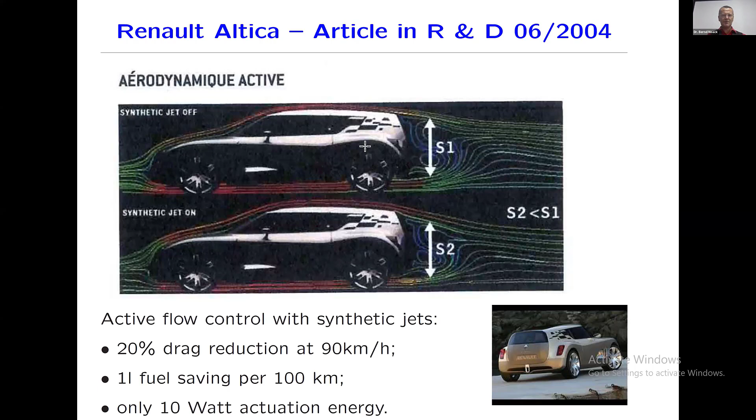Turbulence control can not only be applied to cars. You can start with more simple configurations like a boundary layer, turbulent shear layer, wake flow, jet, and grid turbulence. We are also working at this moment to reduce the drag of China's high-speed trains, which shall run at 600 kilometers per hour at some point. Skin friction reduction of ships is another opportunity. Then you have wind turbines, aero engines, production, medical applications, and so on. I'll stop here - it has applications of epic proportion.

I will now focus on one example related to the car, a simple car model, an Ahmed model. We want to reduce the drag, which is measured here on this balance. The flow comes from left to right, and we manipulate the flow with 4 independently operated slot actuators. The flow is monitored by 12 pressure sensors. Now the name of the game is to find a controller from the pressure sensors to the actuation such that the drag is minimized.

If you look at the flow, here you see a simulation, the U component in the background and the pressure on the Ahmed body. In the color code of the U component, you see many high frequency components and many low frequency components, so modeling this flow is quite a challenge - I would say it's impossible. We managed to do this for the unactuated flow with 100 modes, but to do this for the actuated flow is next to impossible. Now the question is, what shall we do? One approach is model-based control.

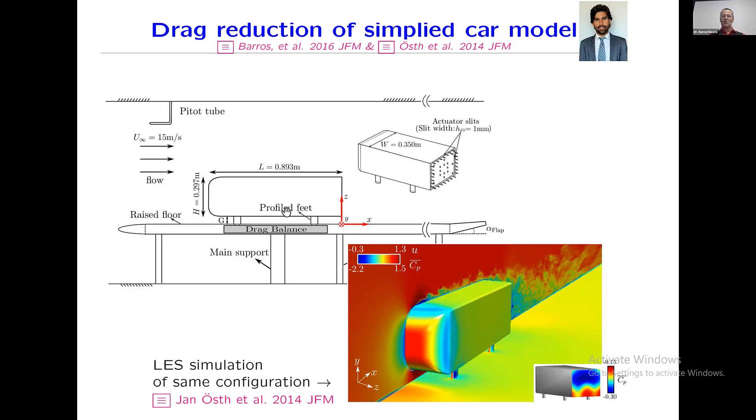In model-based control, you need a model. You have a plant and a controller. You only know some sensor information. You feed it in, the controller translates it into an actuation command. This controller shall minimize the cost—here the cost is the drag. Now you try to find a model which has essentially a very similar behavior, the same sensor readings, similar performance. Then you can build a dynamic model.

A is a flow state, B is the actuation command, S is the sensor signal as a function of flow state and actuation command. With this model, you want to derive a controller which is only a function of the measured data. Once you have the model, you can derive the controller and put it in the original plant. If everything works well, you can reduce the drag as much as in your model.

This works beautifully if you only have periodic dynamics or few frequency dynamics. It works in very simple cases, but in case of broadband turbulence, it's practically impossible.

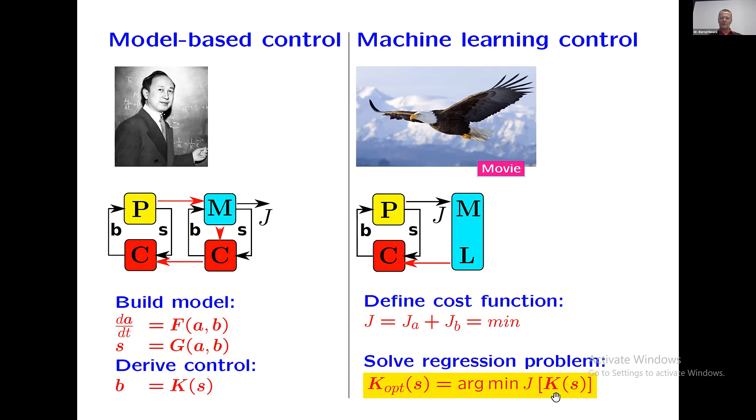But fortunately, there are very powerful regression solvers, and arguably one of the best regression solvers is genetic programming.

What we do here: we have our dynamical system, could be the experiment, and we have the controller. We have a fast inner loop—typically about 1 millisecond from the sensor signal to the decision of the control. And we have a slow outer loop—typically after 5 or 10 seconds we know if the controller works or does not work. Then we test one controller after the other using genetic programming.

Now we apply this technique to the Ahmed body, which I've shown earlier. Reynolds number is 300,000. From an engineering point of view, we can reduce the drag by 22%, and our energy investment is about 3%. So we are distinctly positive.

If we look at how much time we invested, our testing time was less than 1 hour in a wind tunnel. At the end, we found that the best is unison blowing—so all 4 actuators follow the same controller, and the controller only listens to this one sensor signal here.

And I can explain why. Essentially, only this sensor signal can measure the high frequency feedback between actuation and sensing. Everything else would have too high a noise level.

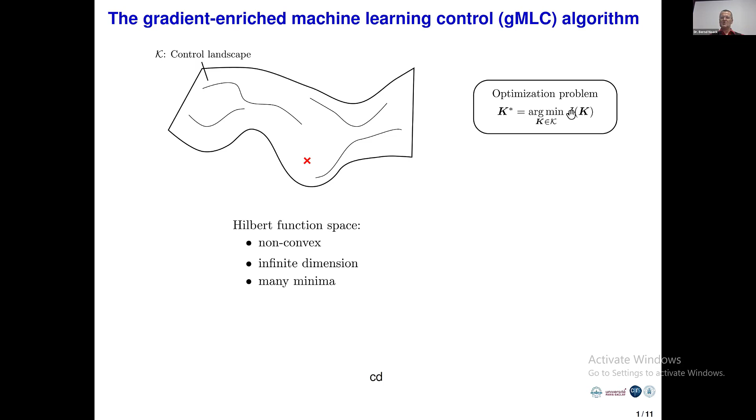Note that our search space is a Hilbert space. It's non-convex, has infinite dimension, has many minima - very nasty. And we want to solve this optimization problem: find the optimal controller which minimizes the cost.

The first step is what we do: a Monte Carlo random function set. Typically we take something like 100 individuals - so individuals are also our controllers - and then we spread them over the control landscape. In the next step, we do our genetic operations. Genetic operations are good for exploration, to find other minima, and they are less good at exploitation, descending down to accelerate, essentially descending down these control landscapes.

We include a downhill subplex. So we take the best individuals with the best cost, we make a linear combination of these controllers, and then we do a simple downhill subplex method in order to descend down. So this is the basic idea.

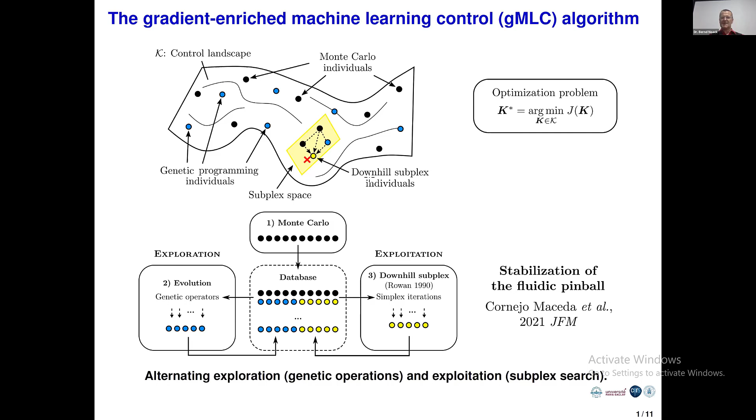And we tested another configuration, which we call the fluidic pinball. This is a few years later, and we did not have the experiment anymore. The fluidic pinball consists of 3 cylinders, all of which can arbitrarily rotate. Our flow sensors are now some U and V component in the wake, shown here. We want to make a controller using these sensor signals and driving the actuation commands, namely the cylinder rotations - 9 sensors, 3 actuators, laminar flow, 2-dimensional.

Why are we excited about this configuration? Well, in principle we can include all or the best, the most dominant drag reduction mechanisms. In the case of the Ahmed body, we have seen boat tailing, and we can emulate boat tailing by rotating the cylinders inward - this way makes the wake small. Another way of drag reduction may be base bleeding, so some fluid goes out of the inner cylinders. We can do that with the cylinders rotating in the other direction.

We can also play a bit with the Magnus effect - this may be beneficial or not. Low frequency forcing has also been observed to be potentially drag reducing, as has high frequency forcing. In this case, we rotate the top and bottom cylinder in a symmetric way. And of course, we can also do some phasor control, using a sensor signal to always stabilize the flow. So now we leave it to our machine learning control to identify the best mechanism - these are candidates which we already know from literature.

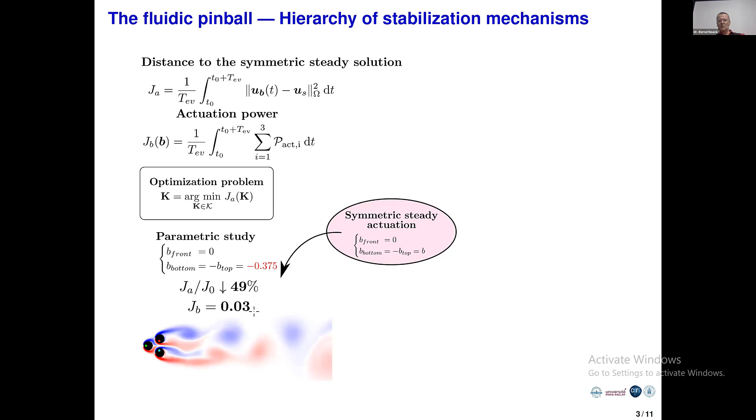The first idea which comes to mind, if you don't know anything about machine learning control, is that we should expect a steady symmetric actuation to work - bottom and top cylinders rotating in opposite direction, driven by one parameter. This is one-dimensional optimization. If we optimize that, we get about 50% closer to the steady solution, and the actuation power is 0.03, about 1% of the towing power, so it can be considered rather small.

Next, we say okay, let's take all cylinders rotating steadily - maybe we gain something more from that. We would not expect it from a nominally two-dimensional configuration, but we get it nevertheless. In this case we use an explorative gradient method to find the optimal parameters. Now we can go further to the steady solution - we are only about 28% away, and the actuation power is about 4% of the towing power. So we are better by enriching our state space, which is what we would typically expect.

As a next step, we take the feedback controller and use our optimizer which was mentioned. Now we get 80% closer to the steady solution with a fraction of the towing power. So this is the best solution.

Now the question, of course, is what did machine learning control find - what the other steady actuations were missing? If this video would work you would see that the control does a combination between phasor control and boat tailing. And I must say, in addition to the sensor signals, we also added the history of the sensor signals.

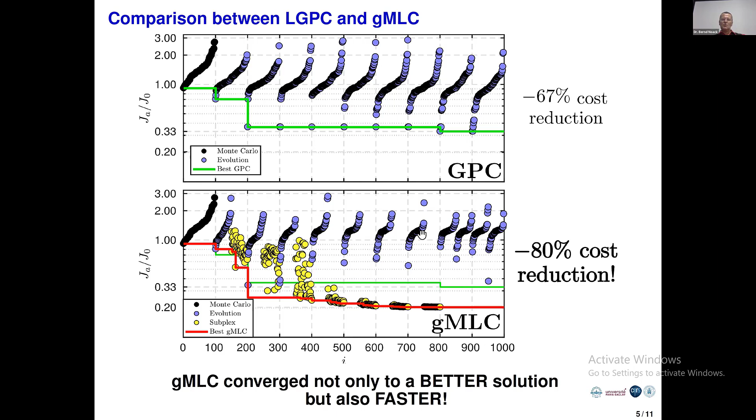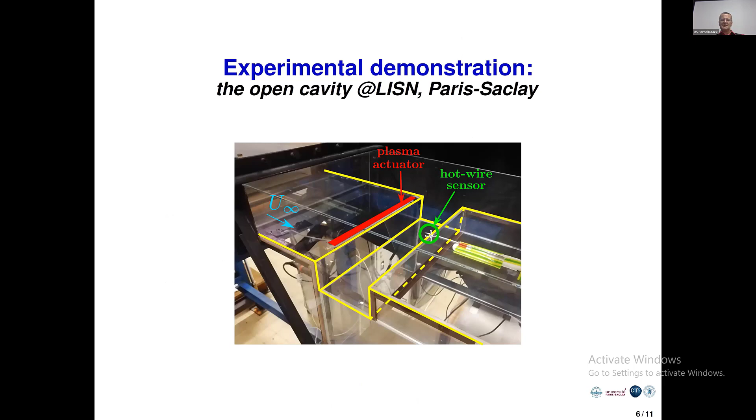Now the question, of course, is would it work in an experiment? We have tried it with an open cavity plasma actuator - here's a hot wire sensor. The goal is to stabilize the open cavity, and the stabilization is monitored essentially by the variance of the hot wire sensor here. A simple experiment.

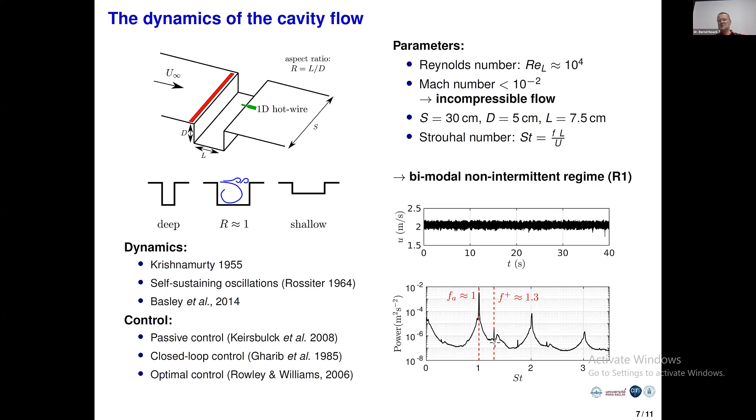Here you see the configuration again. It's not shallow, it's between a deep and a shallow cavity - about 1.5 times longer than deep. Reynolds number is about 10,000, it's an incompressible flow, and this is called the bimodal non-intermittent regime. Essentially, sometimes you have shedding with one frequency and sometimes with another frequency. In this case you see the velocity signal, but if you look at the spectrum, sometimes you see a Strouhal number of 1 and sometimes a Strouhal number of 1.3. These can be explained with Rossiter-like modes.

Plasma actuation essentially accelerates the flow near the leading edge, and if we just accelerate the flow without any dynamics, we see the spectrum here. Without actuation we get a beautiful peak at 1 and a small peak at 1.3, and the harder we actuate, the more we attenuate the flow. So the steady actuation now becomes our benchmark.

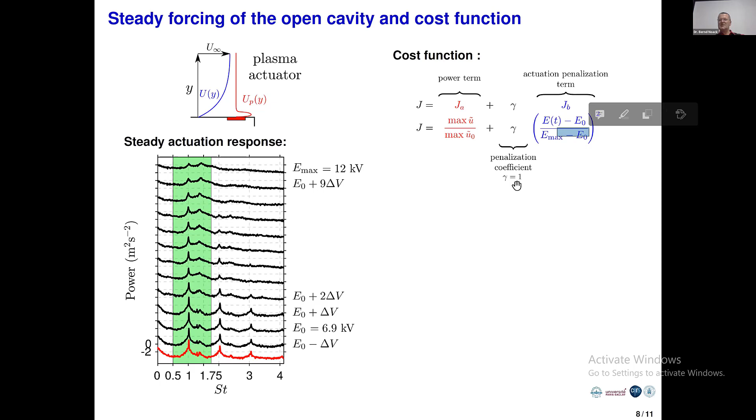What is our cost function? Our cost function is the variance of our hot wire signal divided by the variance of the unforced flow, and we penalize our voltage - so if we go to the breakdown voltage, that term becomes unity. This penalization coefficient has also been chosen at unity, so this is a cost function which we penalize. We limit our observation to Strouhal number 0.5 and 1.75, so that we clearly have the dominant frequency in our monitor, and we optimize the controller.

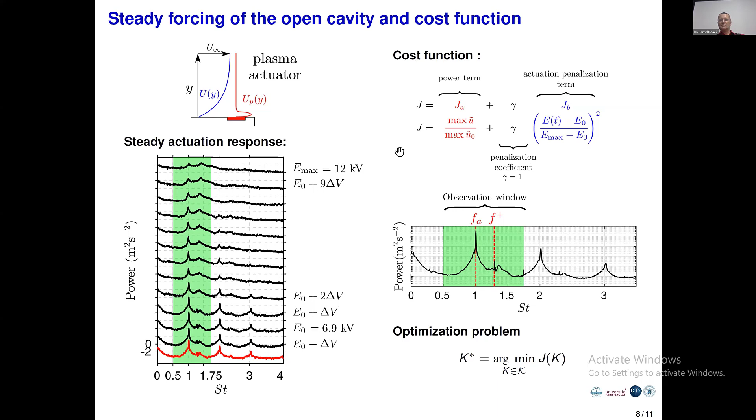Again, we test the controller, we optimize the controller with 1,000 short experiments. What we get here is a cost function of 1%, so we have reduced the fluctuation energy by a factor of 100. The actuation power is about 1% of the breakdown voltage. And there's another quantity, the variance of the hot wire signal, which also goes down.

If we use the same budget of 1,000 individuals with standard genetic programming, then we are 4 times worse, and we also have a larger fluctuation energy. So clearly, gradient-enriched machine learning control outperforms genetic programming control in the experiment.

And the feedback is really necessary, as we can infer from the spectrum.

So, summarizing, machine learning control has learned multi-input, multi-output feedback laws for dozens of turbulence control experiments, always within a budget of something like 1,000 individuals. It has always matched or outperformed all existing feedback laws. We often found surprising frequency crosstalks and surprising spatial solutions, which were not reported in the literature.

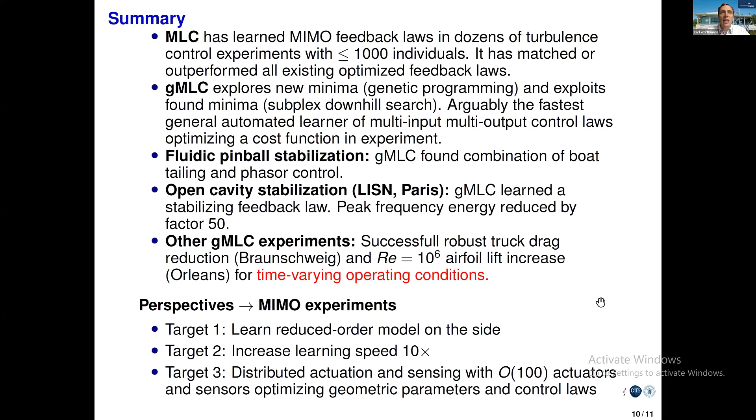I do not know. So we take our sensor signals—let's look at an example. One moment.

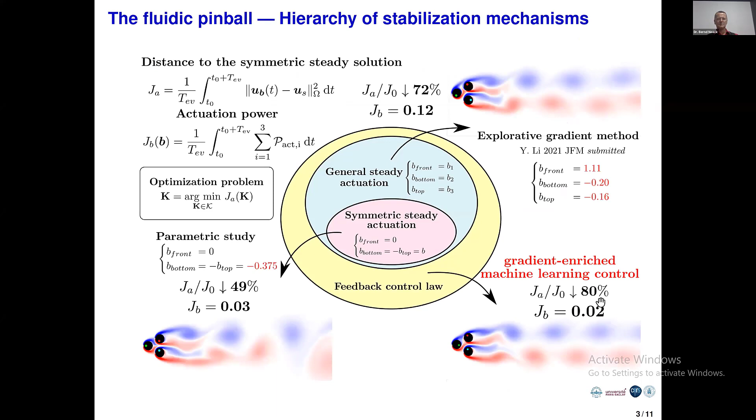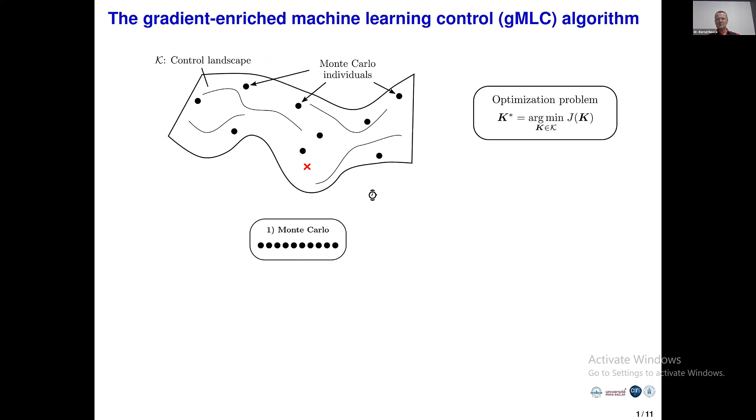So look at this controller. We take the sensor signal and sometimes the history of the sensor signal. So it's dynamic. The actuation command is a function of time. It depends on the flow state.

So this is a steady actuation which I have used. They were just to illustrate, to give our benchmarks, to show that the feedback component brings benefits in comparison with steady actuation.

Thank you, Bernd. The next question, Lars, you can ask directly. I think so, yes. Thanks, Karl.

Just a comment. I think what Stefan meant is dynamic, not in the sense whether it changes over time. Of course, the controller signal changes over time, but the question is whether dynamic information about the history of the signal is included in obtaining the control values. And I think you clarified that already on one of your slides that you do that.

Yes, the answer is yes. And there are multiple ways of doing that. A brute force way is to take time-delayed signals, so you take time delay coordinates. Another possibility is you take filtered sensor signals. So what we also do is take the sensor signal, then take the short-term mean, take the fluctuation, or take a certain frequency component, and then let machine learning control play. So most of our experiments include the time history of the sensor signal.

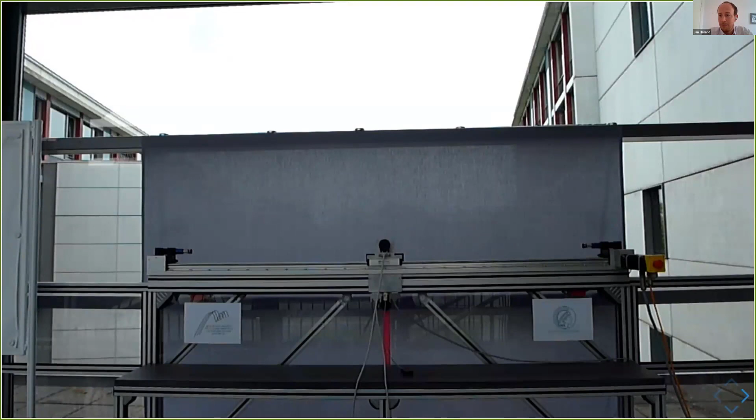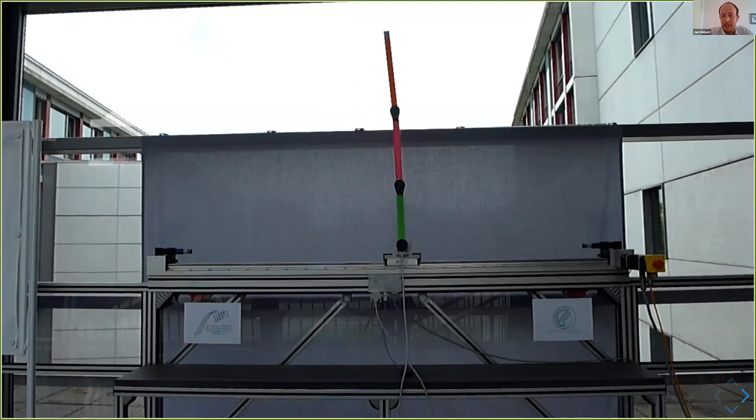But let me start with introducing some motivation and even a video. This is the inverted triple pendulum that we have at our site in the Max Planck Institute. We are able to swing this up with the model that I showed in a general form just on the slide before. The parameter here is that it's a very nonlinear system.

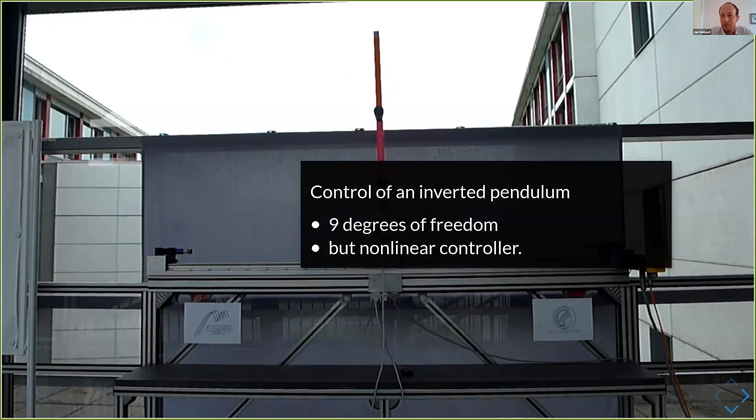So we need a nonlinear controller for that. But it has only 9 degrees of freedom, so not many degrees of freedom. And obviously we are able to run a computer algorithm so that the pendulum is controlled.

Then this is another example that we like to consider a lot, the flow. We also saw it in Bernd's talk before. In the wake, here we have a double cylinder. This is a snapshot of a solution that you won't see in reality because it's an unstable state. You might see it in reality if you apply control to it. Then in simulation, we can apply control and observe this unstable steady state. Here the parameter is that the flow simulation has about 50,000 degrees of freedom.

So a general nonlinear approach to that might already be difficult. But since we talk about stabilization, we talk about small deviations, so we can use linear theory. In fact, here we use a linear quadratic Gaussian regulator to control the flow as we want to have it. And the question we try to answer here is whether we can have both.

Can we have this very nonlinear system, but also large scale? We like these general approaches, and if we think of that, there are a few items that possibly should be there. It should be in a form where we can apply our powerful computing backends—linear algebra, we are very good at solving Riccati equations, for example, or even better if they were linear versions of that. So this should be somehow reflected.

And also there might be optimization to be done, and this should also be reflected in the system that we use for the control. This goes also into exploitation of general structures of the model. Without any structure, it will be very difficult. We try to put both together in finding surrogate models using data that has a good structure, so that we can employ the linear algebra tools we have. So in fact, in the end, we will basically combine all of that.

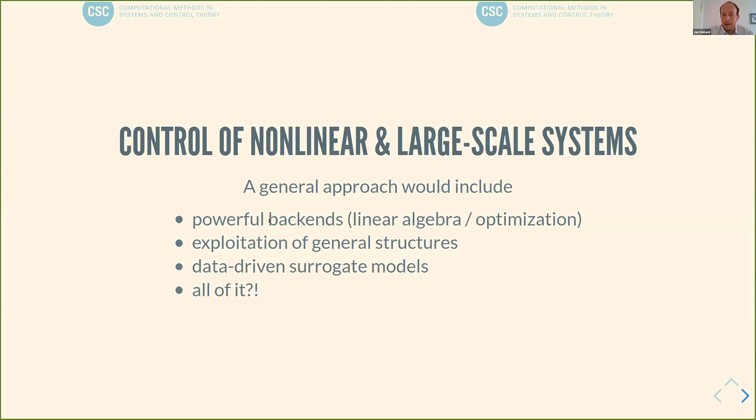Okay, so I will present these few steps for how to get from this very nonlinear system, this general nonlinear system, towards a system that almost looks like a linear system, but with a parameter. The first step is this SDC representation, because under very mild conditions, if you do set point control, your nonlinearity can be factorized in this form.

There are many ways to do this factorization. There are good ones and there are not so good ones. But in the very general case, you can factorize it so that now you have x dot equals A times x, linear systems as we like it, with the little caveat that the A depends on the state. So for every x, we will have a different A. Well, and that's what it is.

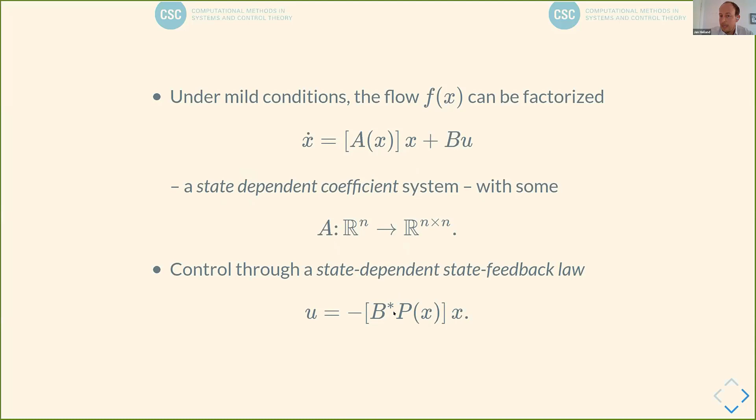But also for this there is theory, and to stay in the same class of system, one can of course think of a state-dependent control feedback law. So here this almost looks like an LQG feedback, but here the gain matrix, the Riccati solution P, depends on the state as well. And the basic approach for these systems, I would say, is using the state-dependent Riccati equation.

This goes back to many works by Banks and co-authors. Here, the feedback is said to be like the LQG feedback, with the Riccati solution also part of the linear feedback laws, with P being the solution to the Riccati equation. In this case, since we talk about state-dependent systems, state-dependent coefficients, the A matrix is also state-dependent, and then we have to solve the state-dependent Riccati equation.

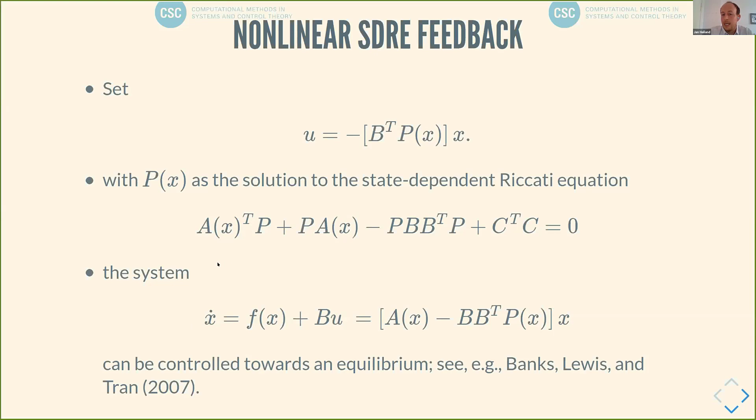This means we have to solve a Riccati equation in every time step. And I said we want to solve large-scale systems, so this might not be the best idea. But still, there is theory for that, and it can be shown that under certain conditions, this nonlinear feedback law will be able to control the system towards an equilibrium.

We did a little update on that, a slight improvement. Basically we showed that instead of having to solve the Riccati equation in every step—whenever the state changes you'd have to solve a new Riccati equation—you can get along with just solving a linear equation. Under a number of other conditions, basically on how the A behaves as the state changes, one can come up with the following algorithm that we have shown to be stabilizing under certain conditions.

One has to solve the Riccati solution once for your starting state. And then as the state evolves, the coefficient, the A matrix, will evolve, will change.

Instead of solving the Riccati equation, one has to solve a linear version, the so-called Sylvester equation, which is a linear equation. Here you can use your powerful linear algebra backends. Just make sure that this update is smaller than 1. If it's larger than 1, or close to the threshold, then one has to do a reset. But we show that with the linear updating scheme, we can still have a stabilizing solution, in the sense that we can control the system towards a steady state, towards a set point.

Now going further, instead of having x dot equals A(x) times x plus Bu, we require a special form of this state-dependent coefficient. This is known as the LPV representation, linear parameter varying system. You can embed nonlinear systems in such LPV representations. If you have an SDC representation, then there is this trivial LPV: just take the parameter rho to be the state itself. Then you see here the SDC representation of the nonlinear system.

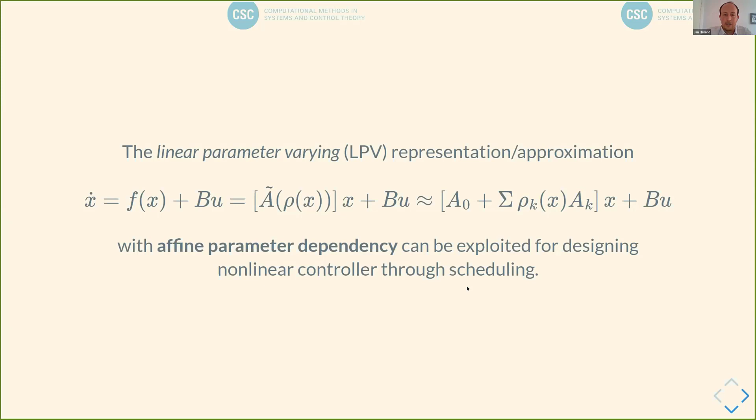The general topic here is controller design for scheduling. One considers rho to be a parameter, and then one has to schedule the controllers accordingly. Typically there is a number of controllers available, and then you identify the regime, and you take interpolants of the given controllers. If you do this well, then you get a functioning nonlinear controller.

And if you have this particular affine linear structure, there is, for example, very often cited work by Apkarian and co-authors, where they were scheduling H-infinity controllers to come up with a globally stabilizing controller that even had some additional robustness properties.

The basic information to that is that one needs to... rho of x encodes the state, and one needs to have this rho confined in a bounded polygon. This is a basic assumption that is needed for that. And then if this controller exists, it can be computed through solving K coupled linear matrix equations, linear matrix inequalities.

We like the Riccati equation because we think LMIs are too difficult to solve. And now if they are coupled K times, they get really large, and this might be out of size. So I will comment on this in a second.

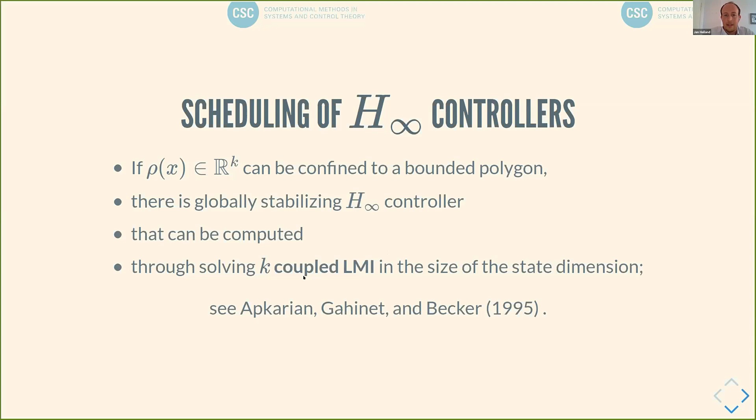Because there's another good structure that can be exploited from this linear parameter varying representation. So let me recall that now A of x is a sum of matrices multiplied with a scalar factor that depends on x. If this is the case, one can do a series expansion of the solution to the state-dependent Riccati equation, which means that instead of solving P of x for every x again, one has to solve a P0, which is a Riccati equation solver, but that happens only once.

Then one has to solve for these factors P alpha, which are solutions to linear Lyapunov equations. So depending on how confident you are with this series expansion and truncating it at a certain step, you may get along with just one Riccati solve and a certain number of linear solves, and update the controller according to this truncated series.

And here again, you see—well, if this parameter k—oh no, I changed parameters here. So if the dimension of the parameters is small, then you are better off with the series expansion. If it's only one, then there's just the square, the cube, and the fourth power. But if there's more than one parameter, then this multi-index kicks in, and there are many different combinations possible until you have a good series that well approximates the actual one.

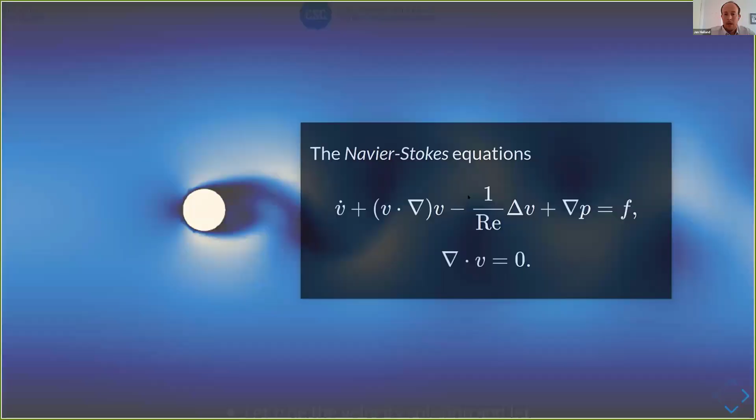Okay, because now if we have, say, a computed velocity solution, then we can find a POD basis to that. Well, did Bernd talk about POD this time? Not sure. So POD is a standard method to reduce nonlinear systems.

What you do is you collect snapshots, information of the velocity. You take a number of snapshots, and then you do an SVD of the snapshots, and then you get the basis that you can express your velocities in with a very good accuracy, despite that you might only have a number of columns here in this so-called POD basis.

And to put this in a formula, with a good POD basis, the approximation of the velocity computed at time t is very well done with this product V transposed. This is the POD basis times the actual V, and this, so this projected but then lifted again, we will denote by the V tilde.

And what comes out of here directly is that with this approach, the POD coordinates, as some people call it, are such a parameterization of the velocity field, the POD parameterization. And this rho are then the so-called POD coordinates. But that's such a parameterization that can be used.

And for the Navier-Stokes equations, because of this particular nonlinearity, this already defines what we are looking for: a low-dimensional linear parameter varying representation of the nonlinearity. In fact, this was the approximated velocity that was once put down to POD coordinates to the low-dimensional space and then lifted up again to the original space, and can be written as the POD matrix V times the POD coordinates times the rho, and this is the sum of the POD modes times the coordinates.

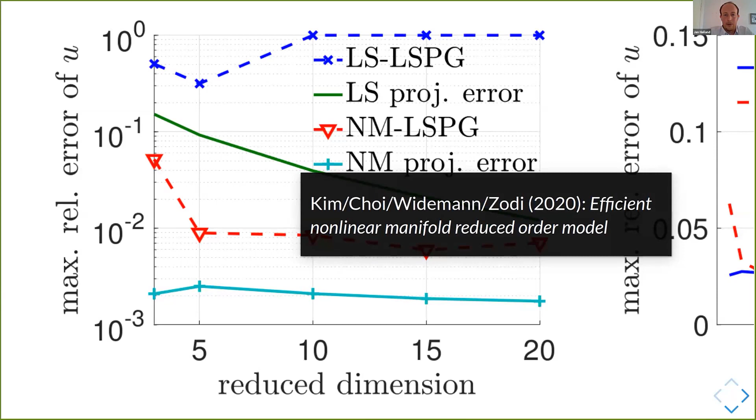Okay, so we also thought about why not use autoencoders for that. And the approach of autoencoders based on convolutional neural networks here in just 4 steps.

The ingredient is the data, and our data are snapshots of the solution that we have computed. Convolutional autoencoders derive from image processing.

The idea is to extract features of the image first and then analyze it. So we first have to represent our snapshots as pictures. I've shown you the pictures of the simulation, so this is a natural way to represent information of the simulation. And then, from here, it's neural network magic.

One has to learn convolutional kernels that extract these relevant features. During this extraction, dimensions are reduced. So if you concentrate on the features, you might not need all this pixel information anymore. That's what's happening here. Then in the final step, we encode what we get out of these convolutions into a low-dimensional parameterization.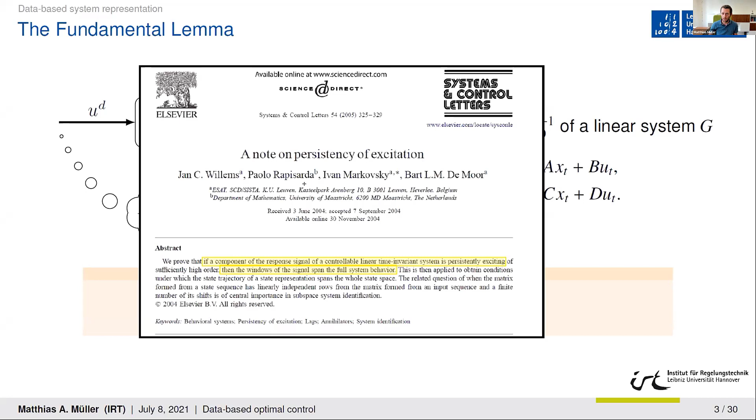Right, so first, what means good or informative data? Just U not equal to 0, U not constant.

The notion we need is persistency of excitation, and we define this in terms of the Hankel matrix. If we have an input sequence of length capital M in total, the Hankel matrix of depth capital N contains windows of length n of this input sequence. So U0 to Un minus 1 in the first column, and so on.

We say the signal is persistently exciting of order n if this Hankel matrix has full row rank, meaning the rank of this matrix equals the input dimension times n, the number of block rows here.

This fundamental result by Jan Willems and co-authors says that if we have a linear time invariant system of order n, which is controllable, and if we apply a persistently exciting input of order capital N plus n, so capital N will be the length of the sequence plus small n, the system dimension, and collect the corresponding output data, then any input-output trajectory pair of length capital N is a trajectory of the system if and only if this equation holds.

So there exists an alpha such that this equation holds, meaning I can write this input-output pair as a linear combination of the columns of that Hankel matrix. Meaning these Hankel matrices span all possible trajectories of the system, or put differently, any possible input-output trajectory of the system is a linear combination of windows, or time shifts, of this persistently exciting input-output sequence, which I collected a priori. This is a purely data-driven system description.

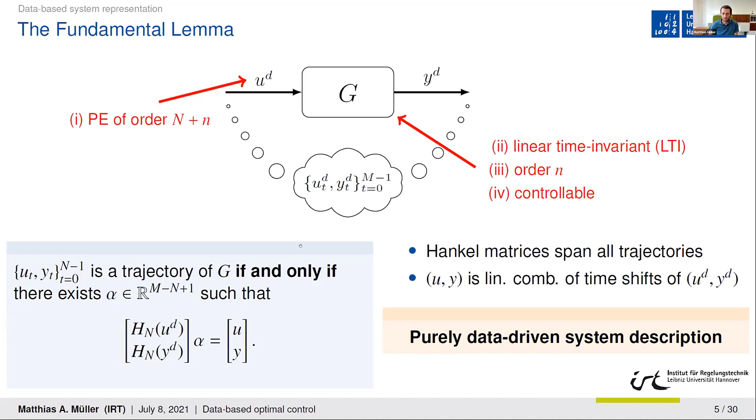Very briefly, I think the 'if' part of this result by Willems is quite easy to see. Linear combinations of trajectories are trajectories again, by linearity and time invariance.

The 'only if' requires the persistency of excitation. Very loosely speaking, it requires order capital N, the length of the sequence, to be able to reproduce any possible length n input sequence, and then plus small n, to be able to reproduce any initial condition of the underlying unknown system.

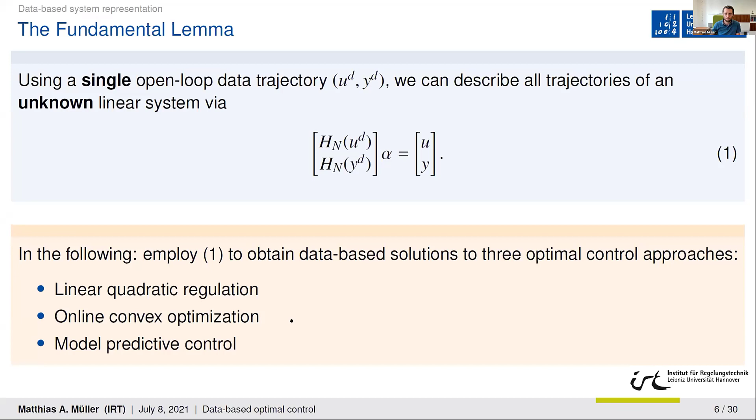So let's go into the first main section of my talk. Here, as I mentioned, the problem we consider is maybe one of the simplest optimal control problems, the LQR problem. The cost function is to minimize this infinite horizon quadratic cost function. For simplicity, we assume positive definite weighting matrices here.

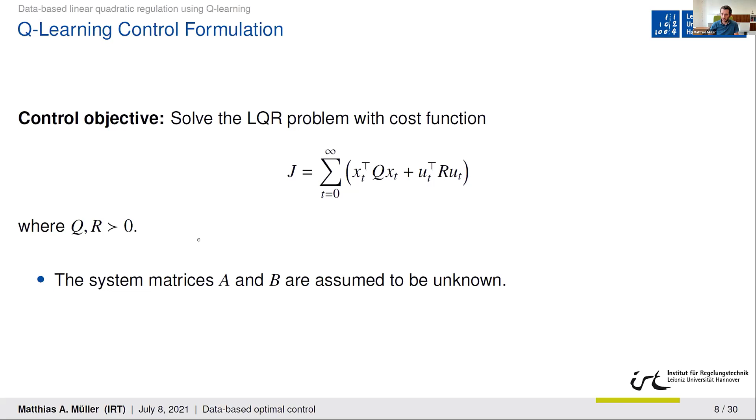In this part, we assume state measurements to be available, so we can measure the state, not only some output, but the system matrices A and B are assumed to be unknown.

Let me first define the value function and then also the Q function, the quality function, before proceeding with specifying the Q-learning algorithm.

The value function, when using a specific input U equals minus kx all the time, is denoted by vk, and that's just evaluating this quadratic cost functional when applying this input.

On the other hand, the Q function is defined for a state and input pair, and it's basically the one-step cost: when being at the current state xt and using input ut, and from then on using U equals minus kx for all future times from time t plus 1. So this Q function evaluates the cost of using an arbitrary input ut at time t, and then using U equals minus kx for all future times.

Now, given that we have a linear system, we can express this Q function, which is basically a quadratic form, as Z transpose times some suitably defined matrix theta k times Z, where Z is just the stacked X and U vector here.

And this theta k matrix is a positive definite matrix. Now, one more remark which will be important for the Q-learning algorithm: it's easy to see that if I evaluate the Q function at U equals minus kx, then I just obtain the value function vk. So in the basic definition of the Q function, with vk replaced by qk of x and minus kx, this will appear later on when we define our algorithm.

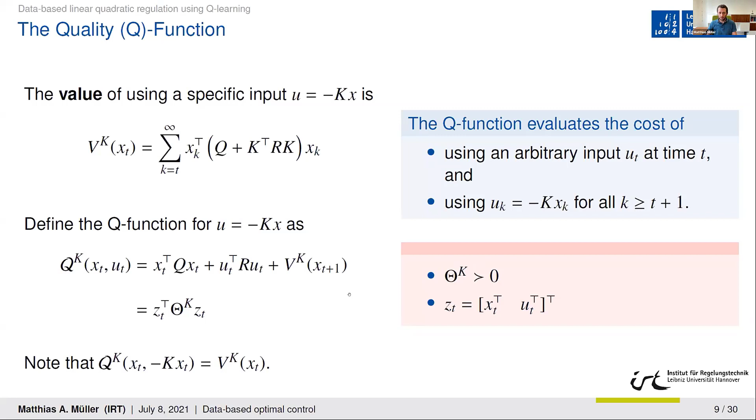Now, if we have a certain control policy and know the corresponding Q function, what we can do, and that's how most Q-learning algorithms actually work, is define an improved policy by minimizing the Q function with respect to U. This clearly yields an improved policy such that Q mu, if we apply mu, is less or equal than Qk if we apply minus kx.

And now, as I showed on the previous slide, the Q function is just this quadratic form in Z. So it's clear that if we just take the gradient with respect to U and set it to 0, this is the optimal solution, where these matrices are just the respective partitions of that matrix theta k.

Now, given these preliminaries, we can define our proposed data-based Q-learning algorithm—any Q-learning algorithm is data-based in some sense. But using Willems' lemma, we can now define an off-policy Q-learning algorithm, and it actually works as follows.

First, offline, we collect persistently excited data. So we apply some persistently exciting input and measure the corresponding system state. Second, we need to initialize our algorithm with a stabilizing feedback matrix. I will comment on that later, briefly, how to do that.

And then this is the core part: we solve for the Q function at the ith iterate of the algorithm. So we solve for the matrix theta I by solving a set of equations composed using the a priori collected data. If you recall, this is nothing but the definition of the Q function, which all the data has to satisfy. So this is just the Q function at iteration I.

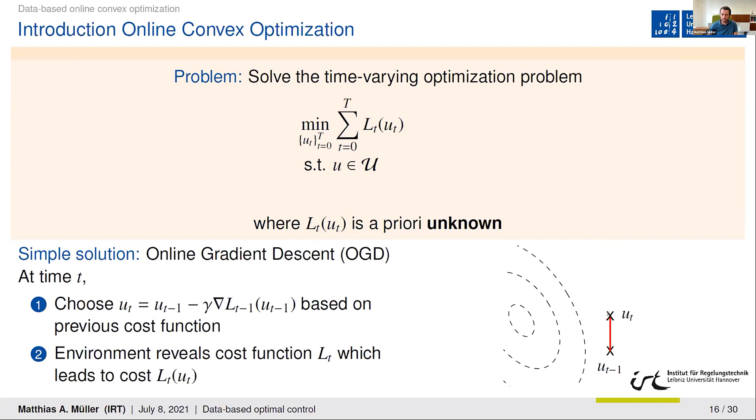Now this has actually been successfully applied to a variety of applications where some terms of the cost function, the performance criterion you want to minimize, is actually a priori unknown, or you have some unknown and unmeasurable disturbances, like in economic dispatch in power systems, data center scheduling, electric vehicle charging, peak shaving in electricity nets, and so on, where either electricity prices, the arriving jobs in a data center, or the loads, the renewables, are unpredictable beforehand. So the advantage is that this is very computationally efficient, right?

You do just, in this very simplest form, one gradient step online. So you don't explicitly solve the complete optimization problem online. You can handle time varying and unknown cost functions. I will discuss later what a good performance metric is in that setting, which is the notion of regret. And also that you can have state or constraint satisfaction.

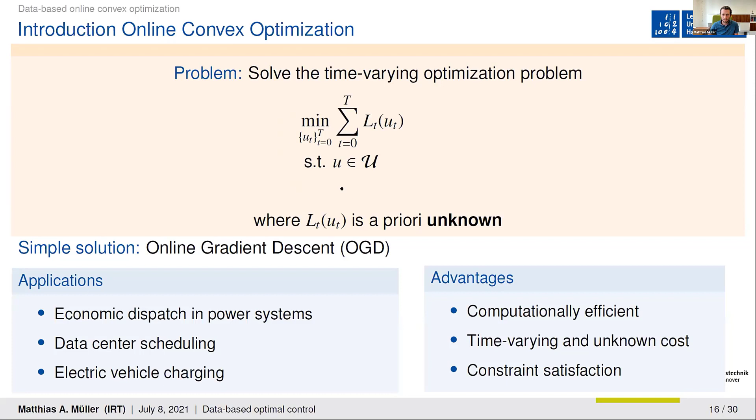Now, our group and also others have very recently, in the last 2-3 years I would say, studied how you can extend that if there is a dynamical system underlying. And today I want to show you very recent results where not only do we have a dynamical system underlying, but also where the system is unknown as well. So we have a priori unknown cost functions and also unknown ABCD system matrices. Again, we will be using Willems' lemma, this data-based system representation, to this end.

Now, very briefly as notation, the minimizers of these a priori unknown cost functions are denoted by theta and eta, and we need the assumption that these are actually strongly convex functions. You can also relax that, I think, to convexity only, but this is the assumption which we in any case need.

Now, what is the algorithm we're proposing for that end? Online convex optimization algorithms for unknown linear systems. So the first step is, let me quickly walk you through that. The first step is that we compute an estimate V of eta using online gradient descent, just in the input dimension.

Second step is that we compute a mu step ahead prediction of the output, and this mu is kind of a prediction horizon which needs to be at least as large as the controllability index of the system, so at most the dimension of the system, right? And how we do that, I don't want to go into detail here, but basically you can see that these Hankel matrices appear again.

So here we use Willems' lemma, and basically this is simulating the system in a data-based fashion. We fix the initial condition of the underlying unknown system by fixing the past n inputs and outputs to be equal to the real observed inputs and outputs. And then the simulated input is a suitably adapted version of the previous optimal input. And then the simulation is again done by suitable rows of that Hankel matrix, which is basically a data-based simulation of our output.

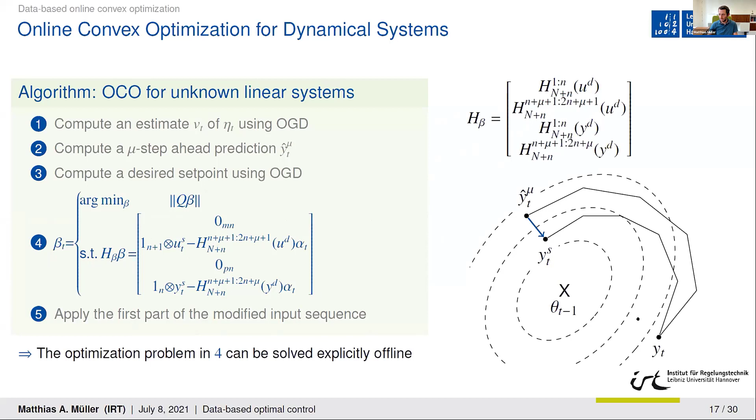All right, and then what we need to do is modify our input sequence such that we really end up at this new desired set point after mu steps. And again, without going into details, this can be done in a data-based fashion using Willems' lemma. And this optimization problem can explicitly be solved offline using weighted pseudo-inverse matrices. So again, not an optimization problem which we need to solve online. We keep the computational efficiency by just having 2 gradient evaluations and various matrix vector multiplications online. And then we just apply the first part, and then we repeat the procedure.

All right, so this is basically the main idea of the algorithm. Now, what are actually the theoretical properties we can show for it?

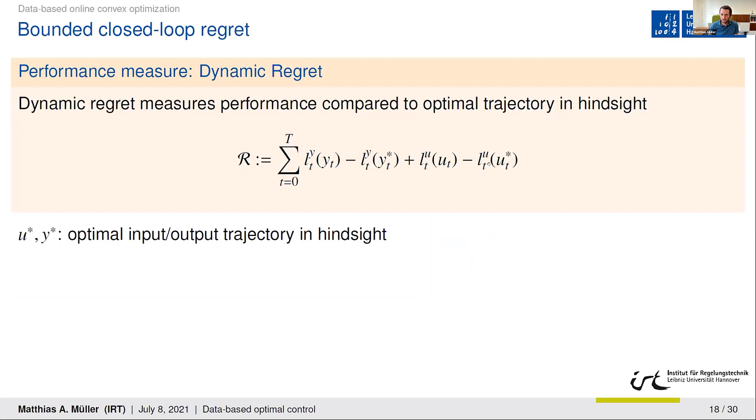First, the performance metric which is meaningful here is this notion of dynamic regret, which compares the performance of our online algorithm to the optimal trajectory in hindsight—the optimal trajectory if I had known beforehand all the cost functions. What we can show is basically this result, which I'll interpret on the next slide, but let me first state the assumptions.

If we have a persistently exciting input, we need a prediction horizon larger than the controllability index of the system. We have two more assumptions which are maybe a little more restrictive. The first is that we have tracking type cost functions, so that the minima of these cost functions are all steady states of the system—if you're familiar with MPC, no economic cost functions.

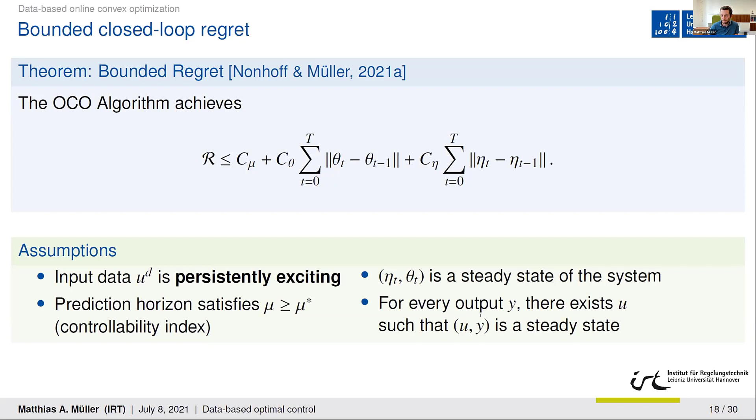This is one of the current research issues. Also, an assumption which may or may not be restrictive depending on the application, but is currently needed in the algorithm, is that for each output y there must exist an input such that this pair is a steady state. There are matrix rank conditions, sufficient conditions for this, which require that we have at least as many inputs as outputs. So these are the assumptions, and this is the result.

Now, what does this actually mean? First of all, these constants are importantly independent of the horizon T over which we evaluate the performance. Basically, the regret—how much the deviation to the optimal trajectory in hindsight is—is upper bounded in terms of this term here, which is a measure for the variation of the a priori unknown cost functions. So if these do not change much, then we have a low regret. Of course, if they change randomly, then the regret will be larger.

Also, as a corollary from this, it directly follows that if the cost function is constant after some time, then the closed loop converges to the optimal steady state.

So what is current work here? So far we only have theoretical results for perfect data, which is maybe not the most practically relevant case, admittedly. But in simulations it works very nicely also for noisy measurements and noisy a priori collected data—that's what Marko is currently working on. Also, using more general cost functions and adding constraints. Constraints have actually been solved in one of our recent works in a model-based state feedback setting, and we're currently trying to incorporate this in this data-based output feedback setting.

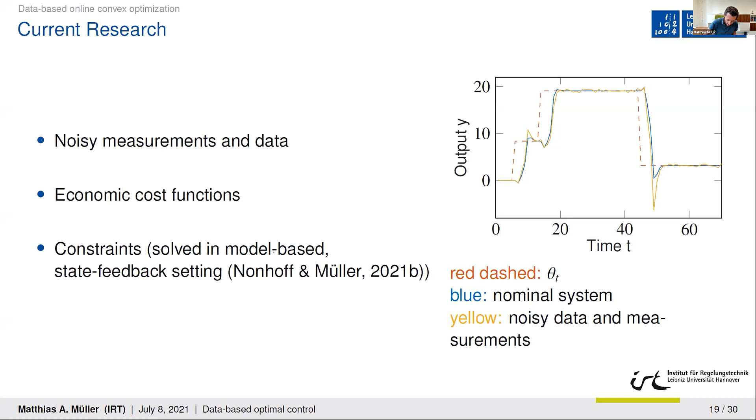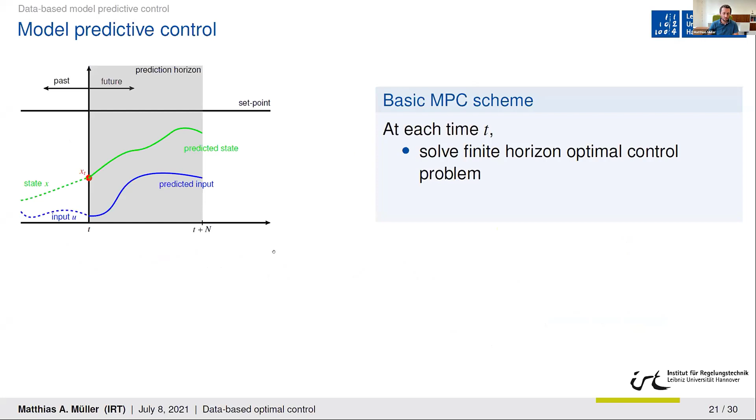All right, so I think I've already taken 22 minutes, so I don't have much time for the third part, but let me at least give you the main idea without going too much into detail. This is MPC. I think I can skip the basics since it's a workshop on optimal control—I guess you all know what MPC is, so I can go over those slides without discussing them in depth.

This is the data-based MPC problem formulation we're using. Again, this is a standard MPC problem for a linear system with constraints. The difference now is that instead of a model, we use this data-based implicit model of the system. Also, similarly to what we've seen before, this fixes an initial condition of the unknown underlying system—we say that the first n components of the predicted inputs and outputs have to equal the past n observed input and output measurements.

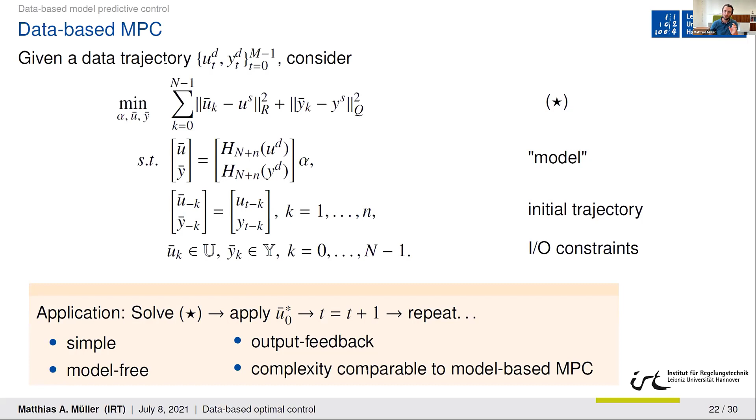So then, as usual in MPC, you solve this to optimality, or suboptimally if you want, then apply the first part of the optimal control sequence, and repeat everything again. So, different from many existing MPC schemes, this is inherently an output feedback MPC scheme. It's model-free, and the complexity, without going too much into detail, at least if you take the minimum number of data points, is comparable to model-based MPC.

Now, we were not the first ones to come up with this scheme. The basic idea was first brought forward in a paper by Yang and Li in 2015, and a group with Florian Dörfler and John Lygeros from ETH did some very nice extensions, reformulations, and applications in 2019. But there were no stability proofs or robustness proofs available, and that's what we've been developing over the last two years.

So I think I can skip the motivating example of why this is relevant, because it can be unstable if you don't choose the horizon properly.

And so one easy remedy, borrowed from model-based MPC, is to use terminal constraints. The terminal constraint is now a constraint on the input and outputs to be the same for n consecutive measurements. With this and with perfect data, the stability proof goes through rather straightforwardly. The only additional challenge compared to the model-based case is that we do not have positive definite, but only semi-definite cost functions, because we only penalize the output and not the state.

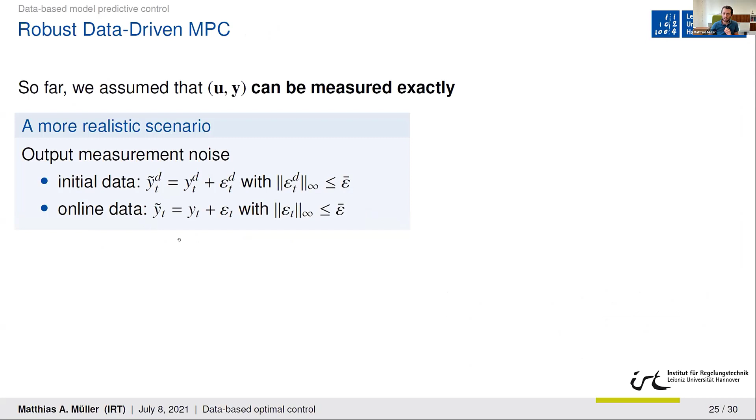It gets much more interesting if we do have inexact measurements, which is always the case in practical applications. Now we assume that we have output measurement noise both in the a priori collected data and also in the online data. There we need quite some modifications and a much more involved proof. But I think the main idea is also quite intuitive.

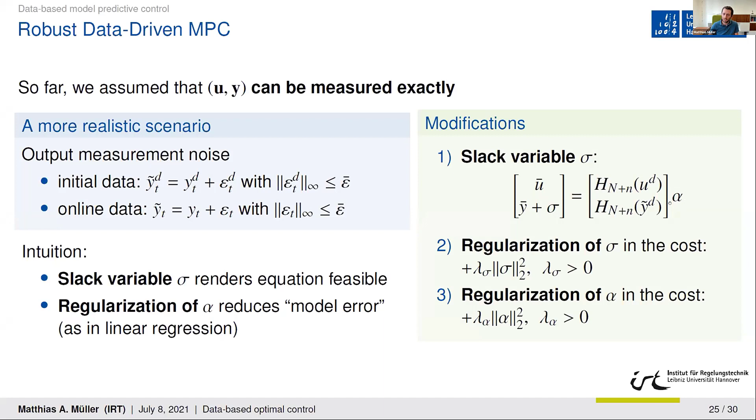So what we do is we introduce slack variables to render the equation feasible, because now we have disturbed data. We add an additional slack variable to make this equation feasible. And then we do additional regularization of both the slack variable and also of this parameter alpha in the cost function. So the MPC problem now looks as follows.

All right, and now under suitable assumptions: if we have persistently exciting data, these regularization parameters are chosen suitably. I won't go into detail here, but we have lower and upper bounds for how to tune them, and also conditions if the noise bound is sufficiently small. Additionally, if we use a suitable constraint tightening, which I don't show here, but we have some results on how to do that in a data-based fashion again, so again without knowing the system matrices, then we can show robust constraint satisfaction, practical exponential stability of the closed-loop system.

And interestingly, I think the region of attraction increases and the tracking error decreases if either the noise bound decreases, or the minimum singular value of the input matrix of the previously applied persistently exciting input increases, or the data length M increases. So in a sense, if the persistency of excitation to noise ratio gets better, then we can also get, as expected, better theoretical results.

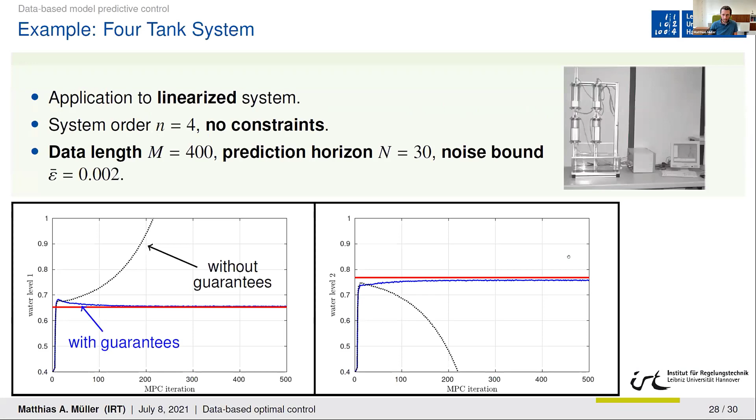All right, so I guess I also skipped the application where we just show it in a 4-tank example that it actually works nicely. Yeah, and with that, I'm at the end.

I want to conclude. So what I have shown you today is that using a suitable system representation in data-based fashion, which was originally proposed by Jan Willems, we can actually exploit that for different optimal control problems, as I've shown in this talk: for an efficient off-policy Q-learning algorithm for linear quadratic regulation, for online convex optimization for dynamical systems with both time-varying unknown a priori cost functions and unknown system dynamics, and also for MPC with stability and robustness guarantees.

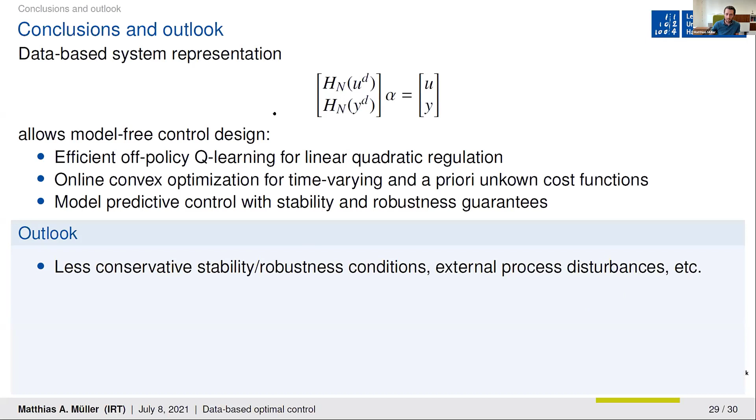So there's actually a multitude of future research issues, for example less conservative stability and robustness conditions, external process disturbances, and so on. This is somehow solved, at least partially, in some of the approaches, and others not yet. But it's a very open and also very active field of research. Not only we, but also others are working on that.

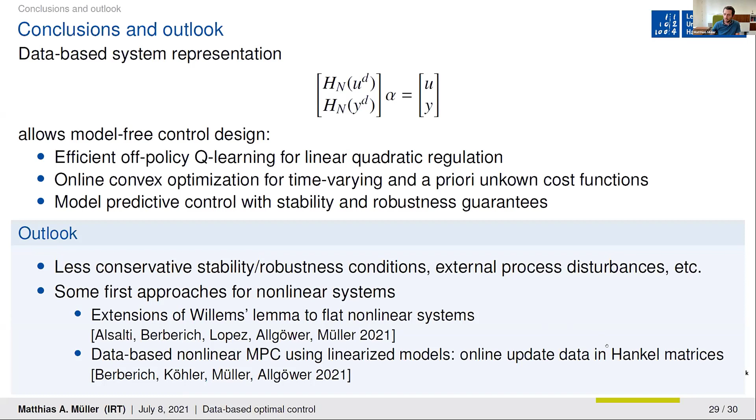There are some first approaches for nonlinear systems. Everything I showed you today was only for linear systems. For example, we have some recent extensions of Willems' lemma to flat nonlinear systems, and also some first guarantees for nonlinear MPC based on locally linearized models, where we actually update the data in the Hankel matrices online.

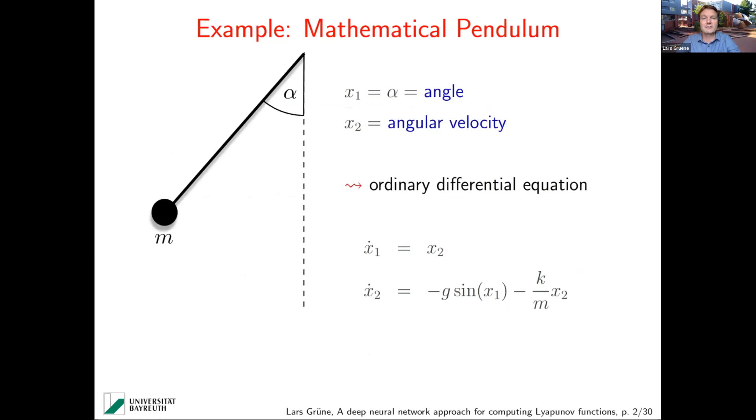What are they good for? Why should we compute these kind of functions? Well, first of all, they provide a certificate for asymptotic stability, which is nice. You can estimate the domain of attraction of an asymptotically stable equilibrium via the level sets of the Lyapunov function. You get information about robustness, so you get some information about how much you can perturb the vector field f such that you still get asymptotic stability.

In case of control Lyapunov functions, about which I will not talk but to which some of these results could be extended, it's actually possible to design stabilizing feedback laws from them. And this is probably, in this context of this optimal control technical committee, the most interesting aspect. It's actually a quite simplified model problem for a more general Hamilton-Jacobi-Bellman equation, because Lyapunov functions are characterized by equations which are a very simple class of Hamilton-Jacobi-Bellman equation.

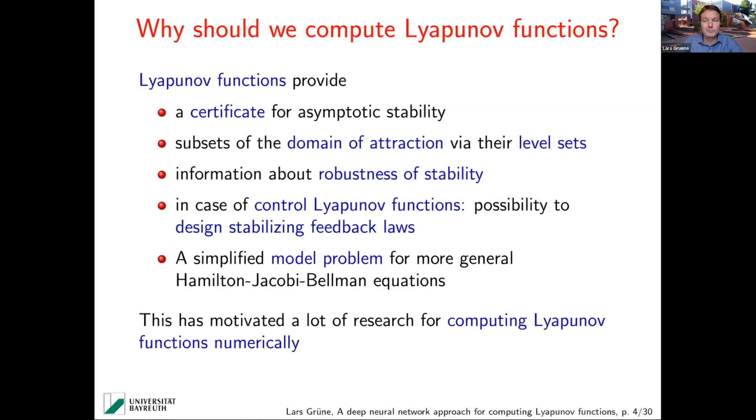And this, of course, has motivated a lot of research for the numerical computation of Lyapunov functions. There are series expansion methods in the literature which use what I call Zubov type equation. This is precisely the Hamilton-Jacobi-Bellman equation I was mentioning. So it's this kind of first order PDE, or a transformation thereof, and these are used in these schemes.

There are finite elements for this equation. There are finite elements combined with linear programming. It's a very interesting approach by Sigi Hafstein, developed during the last 20 years. There's sum of squares methods, of course. There is the radial basis function approach, so mesh-free methods by Peter Giesl and co-authors.

And what all of these methods have in common is that they use some kind of gridding of the state space or of the parameter space, where the computational effort grows exponentially in the space dimension n of the ordinary differential equation. So if we have an ordinary differential equation in dimension, say, 2, 3, 4, 5, it can work or cannot work. If we go beyond, it gets really, really difficult to solve them.

This is the notorious curse of dimensionality, a term coined by Richard Bellman, as far as I know, which is apparent for all classes of Bellman equations, Hamilton-Jacobi-Bellman equations, and so on. I think that for general ODEs this is probably not a bad estimate, but simply just unavoidable, because the complexity of such a Lyapunov function can really grow.

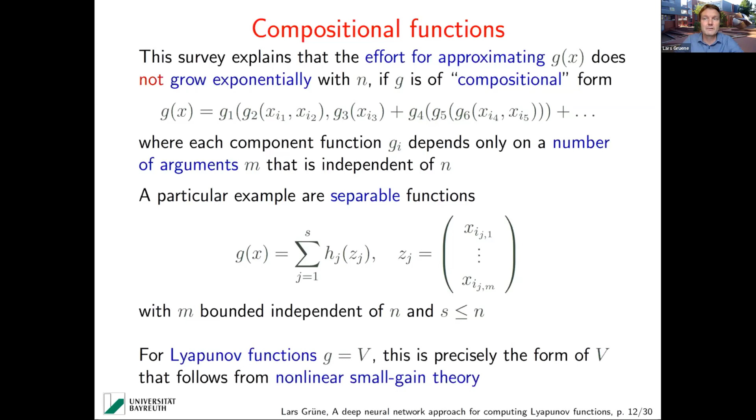For Lyapunov functions, this is precisely the form we get from so-called nonlinear small gain theory. Let me spend three slides explaining what that is.

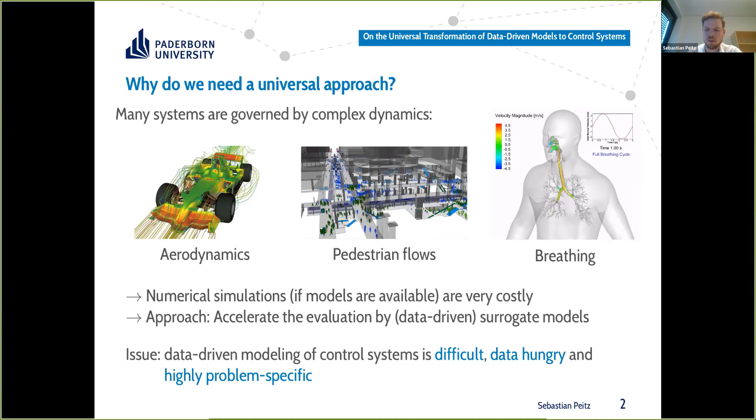The idea or the issue I see in data-driven modeling is that if you consider control inputs, then this modeling part often becomes more difficult, more data hungry, and may also be highly problem specific, which makes it a complicated task that has to be repeated if you change the system or the boundary conditions in your PDE. This is why I think a universal way to incorporate surrogate models into control systems may be helpful. This is what I'll be talking about.

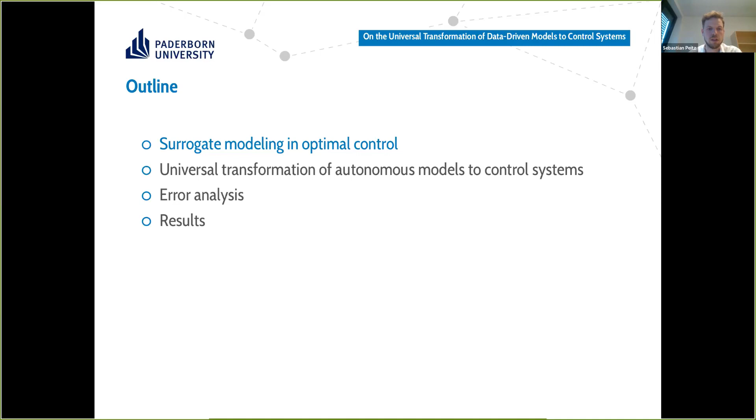Before I do so, I'll give a quick introduction into the notation and also into surrogate modeling, in particular in the context of control. Then I will spend quite some time discussing how we guarantee errors or error bounds for such systems, which I think is quite crucial if you think about real applications in security relevant systems like autonomous driving.

What I would like to solve is this very general optimal control problem where I have an objective functional J, which depends on the state Y of a system described by a differential equation. So what I have here is Y dot equals G of Y and U. It's an ODE in this case because Y only depends on time, but this may also be the discretization of a PDE, or you could also pose this as a PDE constraint problem, but let's stick with ODEs for now, which makes the error analysis a bit easier.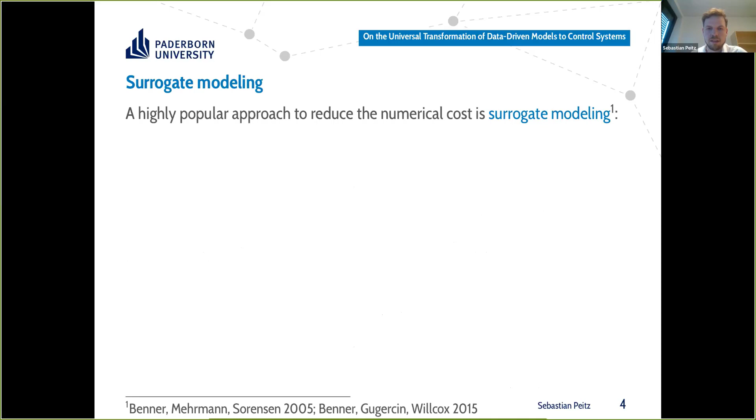This is the expensive part in my system. I need to evaluate this Phi many times, and this is expensive, which is why I want to replace this Phi by some surrogate model. As I said in the beginning, this is highly popular, and there's tons of literature on this—POD, for example, or other methods. There's really quite a lot.

The general idea is to replace the dynamics for my system state Y by a reduced order model Phi r for some surrogate state Z. The relation between the full state Y and the reduced state Z is given by this function f, the observable, which might be the full state observations, so Z and Y are identical. We may have partial observations, pointwise measurements, projections on subspaces, nonlinear functions of the state, and so on. This is rather arbitrary and depends a lot on the surrogate modeling technique and the system you're looking at. But this has been done for very different settings over and over again. And the problem is that in the control setting, this becomes more challenging.

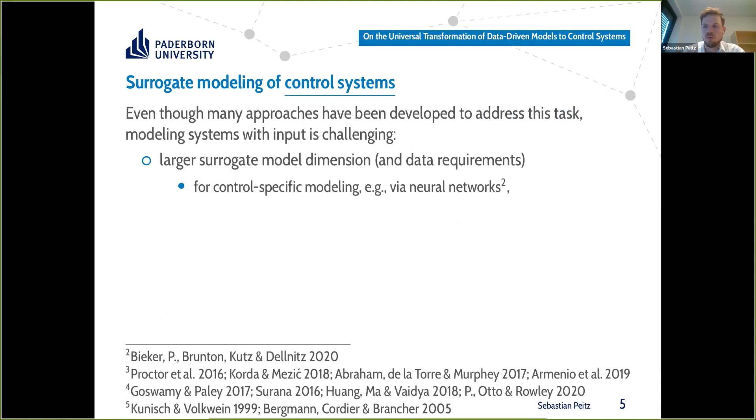As I already said in the introduction, one reason is that the surrogate model dimension usually increases, and so do the data requirements. For example, with neural networks you need to consider the control input, so the network layer number or number of neurons increases. Or if you use popular state augmentation approaches where you treat the control input as an additional state, you again get an autonomous system, but the dimension increases obviously, and so does the data requirement.

The second large challenge, from my point of view, is that the modeling may be very problem specific. For example, the Koopman operator has been really popular in the dynamic systems literature recently—it's a linear operator describing the dynamics of the observable function f that I introduced on the slide before. You need to exploit this linearity, and this is tailored to the specific surrogate modeling approach.

Or in POD, for example, you need to modify the data that goes into the surrogate modeling process. In the case of POD, you need homogeneous boundary conditions in your dataset, because otherwise the Galerkin basis you create using POD may violate the PDE boundary condition. This is quite tedious and depends on the very specific boundary conditions of your setup. So these issues make control problems much more challenging than the autonomous case, which I think is more advanced at this point.

For several methods like the Koopman operator, neural networks like LSTMs, reservoir computers, or stochastic modeling approaches and so on, there has been a lot of work. I think papers are appearing on a daily basis on surrogate modeling using these methods and others.

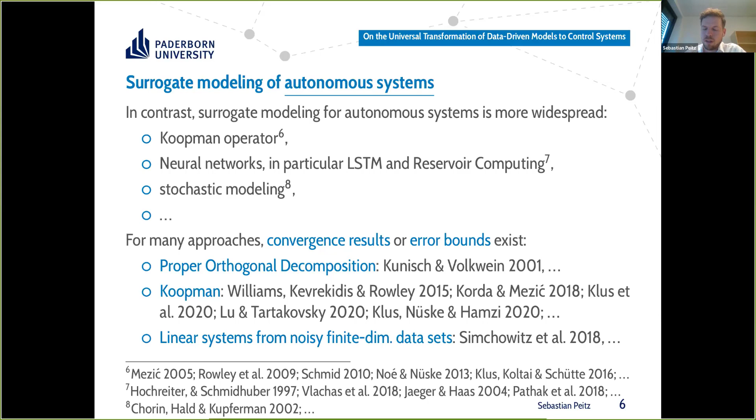So the question I would like to ask before going on is: if we want to use this in a universal way, and if modeling of autonomous systems is so much more advanced, then instead of constructing surrogate models for the control system, why can we not adapt the control problem to our modeling approach and just pick our favorite modeling methodology? I wouldn't ask this question if I didn't think I have an answer.

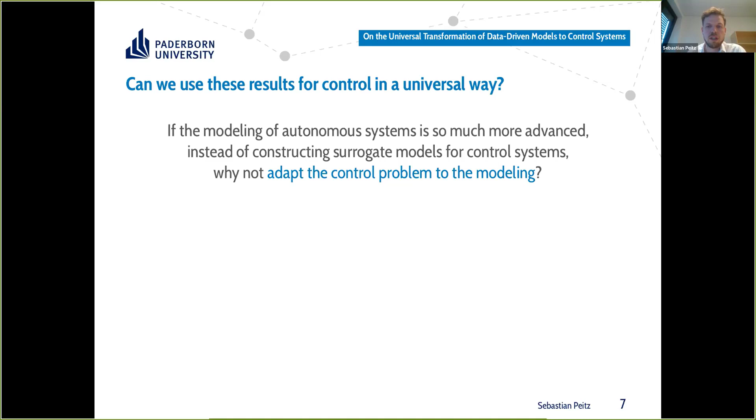The approach I would like to suggest is to quantize the control. If we have a control set U—let's say, for simplicity, box constraints between U min and U max—then we can replace this with a finite dimensional set V, which may only consist of the control bounds, just the two entries U min and U max.

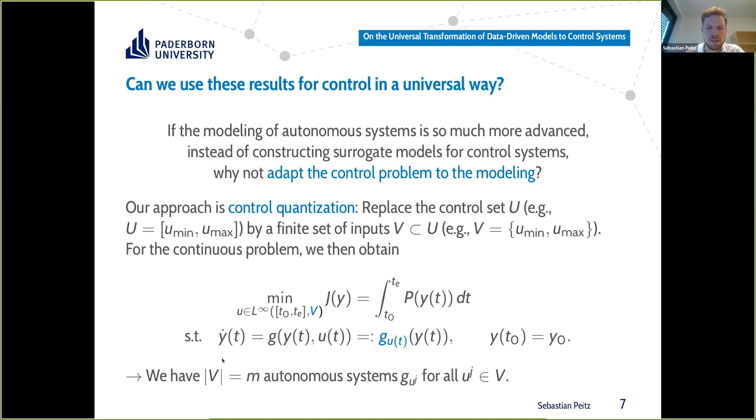This allows us to replace the continuous control problem from the first slide with a version where we replace the set U by the set V, which makes the right-hand side not a non-autonomous system, but a finite set of autonomous systems depending on which U I pick. I have M of these autonomous systems, which is the cardinality of my set V, that I have to determine myself. So this is just a copy of the problem we had before.

The question now is, does this work, or is there a reason why it should work? The answer was already given in the 60s by Filippov and Ważewski. It's a rather abstract result, but what they say is that if the reachable set corresponding to my original control set U is contained in the convex hull of the reachable sets corresponding to the dynamic systems constructed by V, then the set of trajectories corresponding to V is dense in the set of trajectories corresponding to U. So basically I can get away with this because the trajectories are essentially identical.

The problem now is that I have a control problem with infinitely many switches. So it's a very, very complicated control problem that I need to solve.

And the discrete time version does not have infinitely many switches, but if I have now a prediction horizon of length P, then I still have M to the P input possibilities, and this is still exponentially increasing in cost.

But I have a huge advantage because I have now, as the right-hand side of my dynamical system, just a finite set of autonomous systems. So I can pick any off-the-shelf method and replace my right-hand side by the model I wish to use—let's say a neural network, POD, the Koopman operator, and so on.

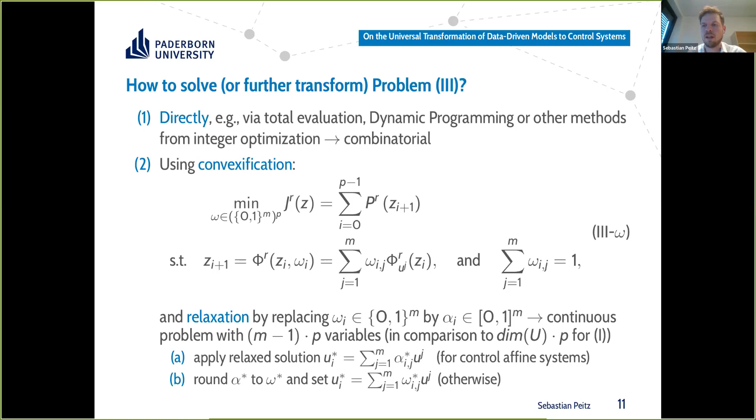So the rounding that I discussed at the last step was introduced by Sager, Bock, and Diehl. I'm not going into the specifics mathematically, but what you can think of it is that it works as some kind of rounding with memory.

Meaning that if your alpha value is 0.8 all the time, then you will round to 1, 80% of the time, and you will round to 0, 20% of the time, so that on average, you reproduce your input. And if you have now a time variant signal, then the rounding varies also in time.

But the mathematical result is that you can bound the error between the omega and the alpha, or the integral error between these two quantities, by the number of decision variables m and your time step. So if you make this time step small, then essentially you have related control signals.

And this now allows us to show a quite nice result, which says that if I have a control trajectory u, so a continuous control input to my system, and this creates a trajectory y, then there always exists a trajectory u bar from my finite set v, for which I can bound the error between these two trajectories.

So if you give me a u, I can find a u bar from my set v, and the error can be bounded by these constants, which I will not discuss in detail, but it depends on how I pick set v. It depends on the time discretization and also on the deviation in the initial condition, which is due to Gronwall's lemma. And then you have this exponential error bound.

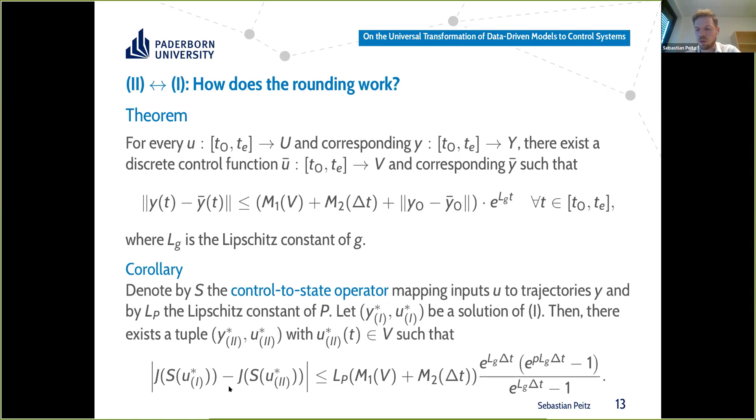And by very simple extension, you can then show that if you solve the optimization problem 2, then you can bound the optimal function value of the optimum of your problem 2 to the optimum of problem 1. So you have really, you can quantify how large the error is that you introduce. And this can now be accompanied with a modeling error that we need to have.

So this is where I am going to introduce a large assumption, because as I said in the beginning, there exist surrogate modeling techniques with error bounds. And this is what I'm going to assume now, that I can bound the error between my true system, f of my true right-hand side phi of y, and the surrogate model phi r of z by some value e, which may be constant or may depend on the time discretization, whatever. I'm just saying it has to be bounded.

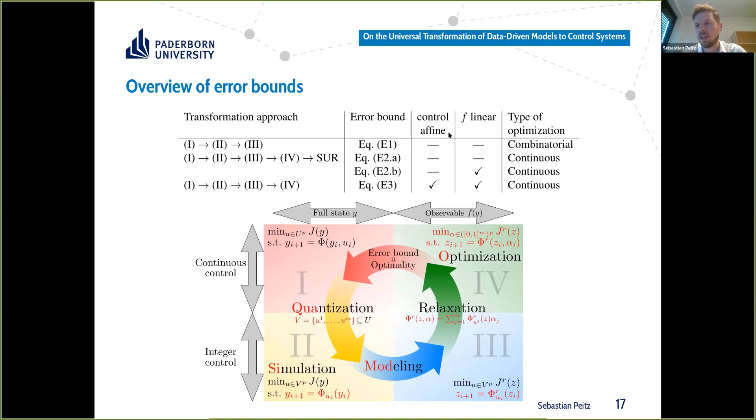So before I get to the results, just one quick recap of what we had. So we started with a continuous problem number 1. Then we quantized this, introduced surrogate models off the shelf, for which we do have error bounds, and then use this relaxation and sum up rounding approach to go back to a continuous optimization problem. And then we can have different error bounds depending on system properties that we can use, for example, linearity of the observable function or control affine properties.

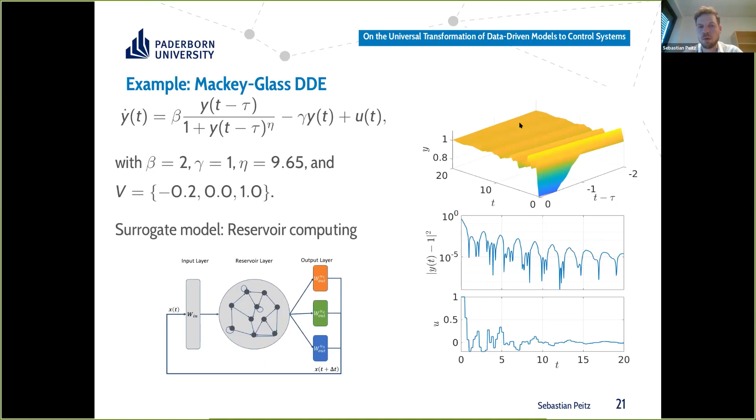Two examples of how this works: the Mackey-Glass equation, a delay differential equation for blood cell production, where we have 3 input levels, minus 0.2, 0, and +1. We use a reservoir computer as our surrogate model with 3 different output layers, because in reservoir computing you only train the output layer. So we have 3 output layers corresponding to these 3 autonomous systems. We can then easily stabilize the constant function 1 with our modeling approach, using just data collection and applying this algorithm.

The final example is the Lorenz system, where I'd like to discuss this linearity of the control input. If you use linear control, and EDMD as a numerical version for the Koopman operator approximation, then both this continuous control input and the sum-up rounding, which gives this blue blob because the switching is quite fast, both work equally well.

But if you have a non-affine control input, this linear interpolation between different systems does not work so well anymore. The sum-up rounding still does the job, as it has essentially no requirements on my system. Okay, and this brings me to the end of my presentation.

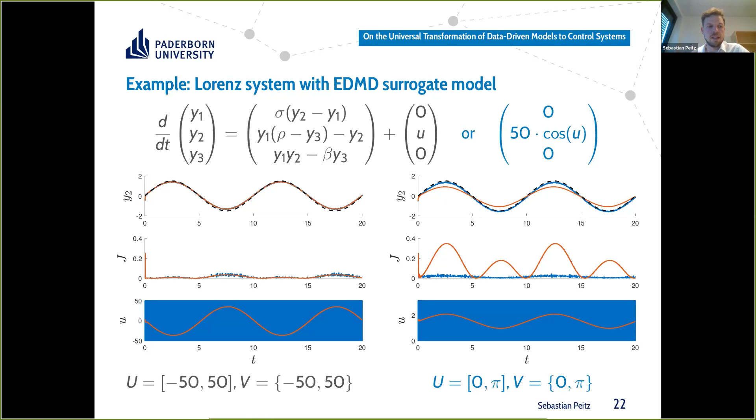Thank you, Sebastian, for the very interesting talk. And there's already the first question coming from the panelists. Bernd, please go ahead.

It looks like your idea of discretizing the actuation commands is very promising, and I can see why. Can you give an idea which problems become solvable that were not solvable before? Where do you gain maybe a factor 10 in computing power, or where certain things become only doable with your approach?

Yeah, well, what I've done in this case is use MPC to solve all these problems. So I need a model that is really fast if I want to do this in real time. For example, for the Navier-Stokes equations, we used a Koopman operator-based model which is 5 orders of magnitude faster than solving the Navier-Stokes equations. So I'd say for complex systems, model efficiency is really the key.

I would argue that we could use MPC on the Navier-Stokes equations without any system knowledge, because what we have done is only measure lift and drag of the cylinder and construct a surrogate model for only lift and drag. So we have no information of the flow physics.